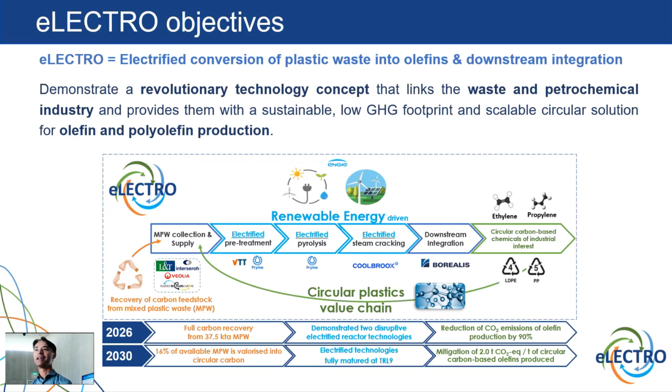And then there were some initial tests, but it was just heating. So it was a big if, because I think industry was quite doubtful: will this ever work? Because a rotating reactor and steam cracking, coke formation, this sounds like a crazy idea.

So you see here the 4 objectives. Really demonstration, large scale. Most European projects stay on bench scale. They never do something on high TRL level. Here we went to high TRL level. Both the pyrolysis and also the Coolbrook plant, which people will visit, are high capacity units. We really tried to make polymers again, starting from the plastic waste. So really closing the value chain, really showing circularity.

And then, of course, we had the electrification, and we really assessed when this concept, also from a CO2 point of view, will be better than what is currently available. And that is not always the case. I will be honest about that. It's not always the case that it's better than what's already available. It depends. And this is also something we learned. But electrification, coming with renewables, is really a good step forward.

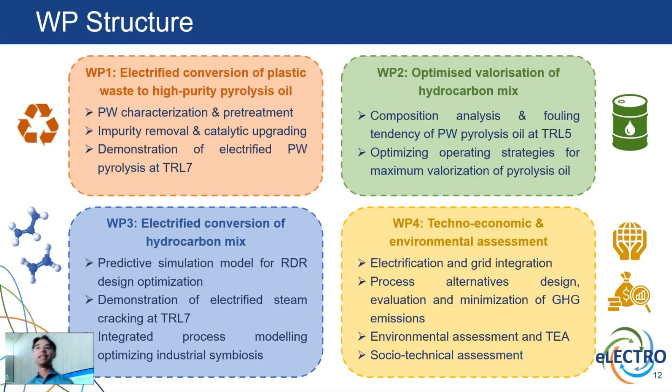So if we start with the value chain, you see, starting with plastic waste, very detailed characterization. We went to the pretreatment with an extruder. Also there you have different options. But if you really want to go for a continuous process, then feeding with an extruder makes a lot of sense. And you can at least partly remove some of the halogens, as will be illustrated.

Then we go to pyrolysis, and pyrolysis is a very robust technology, which in the end has a main product oil. And that oil can be fed to a steam cracker. You also form a gas fraction and a solid fraction. We tried to look a bit at the valorization of those products for the gas, at least as possible. But okay, it also requires some further purification there.

For the char, that is a challenge, and that also depends on which company is actually doing this. What kind of permits do you have? If you are a company like Indaver, where you have a permit to use that char to combust it again, then it's relatively clear. But if you are in the middle of nowhere, then your char can even be a cost to get rid of it. So that really affects the business case.

And of course, this needs to be optimized. So our objective is to feed it in a steam cracker. And you can do distillation, you can do upgrading, you can play with conditions. But in the end, you want to feed as much of these oils to a steam cracker.

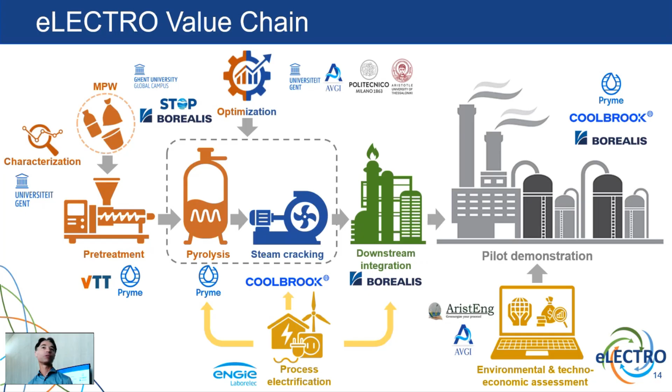And so it all started with the pretreatment. I think the main part there is halogen removal, and then here the modular extruder, and VTT will elaborate on that. Of course, the characterization is really crucial. We made a lot of effort to do that in a very detailed way.

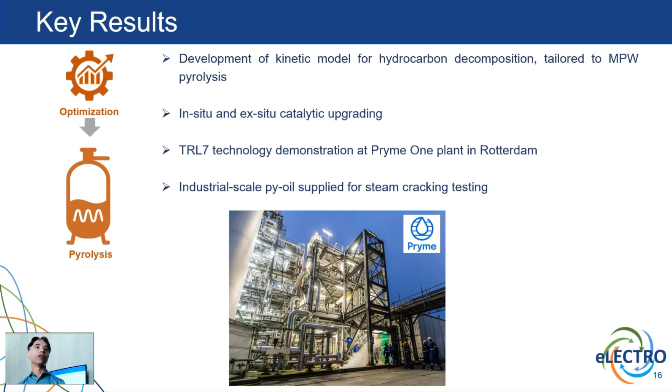For the pyrolysis, we had the pilot plant at Ghent University and Pryme, but we also had the large-scale unit in Rotterdam. So that really allowed us to show that we can actually scale this up. We also looked at catalytic upgrading, and we developed models for the pyrolysis part. So we did very fundamental work, but also very applied work.

And then we went to the steam cracking part. We compared the conventional steam cracking process with the very novel technology of Coolbrook. And well, we made it work. We didn't only use classical naphtha, but we did 100% pyoil, and that's a bit crazy, I would say. I think no steam cracking company would feed 100% pyoil to one of their furnaces. But we did it, and I think Tuomas will report a bit on the data.

The unit is still there, so it didn't explode. There's limited corrosion, I think, so it can work, and it was a very big achievement. Just the fact that we were able to demonstrate this RDR is already a major achievement. And that happened in time and within budget. Voilà, within budget. This is also never easy.

And then the downstream. If you look at these feeds, they are contaminated. It is what it is. Even if you do pre-treatment, you will end up with oils out of spec. So the question is, how do you solve that, and what can you expect? What can you do to force that a bit in the right direction? And we see that dilution helps. I will summarize it like that.

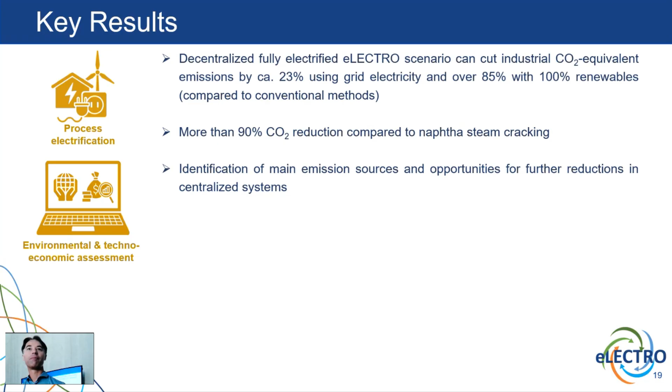Okay, today is bad, Mark, I agree. But I think if you go more to the south and see the temperatures now in France, 45 degrees, then you know what will happen in Spain over the summer, and I think we have to do something.

So we will see. Now I will hand over the word to VTT, and they will walk you through their results of work package 1 primarily. But you see that all the partners will present their contribution. We didn't really go for the classical format where we walk you through work packages. I think it's nice to see all the partners and their contributions and that they can illustrate their highlights. I think all partners did an amazing job and they deserve to be in the picture today at the end of the project. So thank you.

So hello, I'm Eetta Saarimäki and I'm from VTT Technical Research Centre of Finland. Our objective was this pre-treatment, and it was one task in work package 1. I want to explain how we did this in the project. Our target was to develop a novel extruder at pilot scale as the pre-treatment for various challenging mixed plastic waste materials for pyrolysis. And the halogen removal was targeted up to 95%.

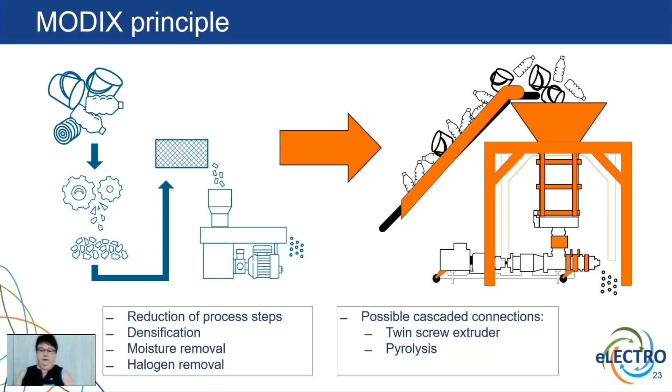And this is the simplified flow chart of this extruder. So we have now conveyor belt, and then the base Modix single screw extruder in there, and then we have this cascade system where the material goes to twin screw extruder. Now I can say that unfortunately we figured out that the output with that extruder is a bit on the low side, and we have now ordered a new one that is taking more material from the Modix extruder, and the output will be bigger. This is only something up to 10 kilos per hour, but we can double or triple it with the new extruder.

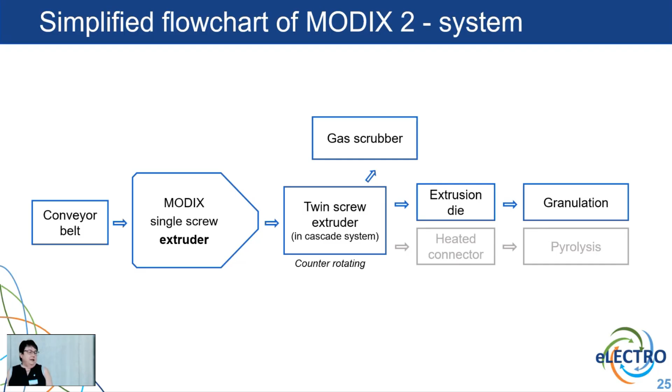After the small lab scale tests and surrogates where we knew what materials were in there, we got the materials from Korea and Indonesia. Indonesian samples are called STOP, and they came from Borealis projects, and then Korean samples came from Ghent samples. And we did preliminary analysis for the materials, and none of the materials exceeded 1% of chlorine in there, mostly even lower. And the DSC showed that Korean samples were a mixture of polypropylene and polyethylene, and Indonesian samples contained also a small amount of polyester, most probably PET, but nothing very worrying came out from these preliminary feedstock tests.

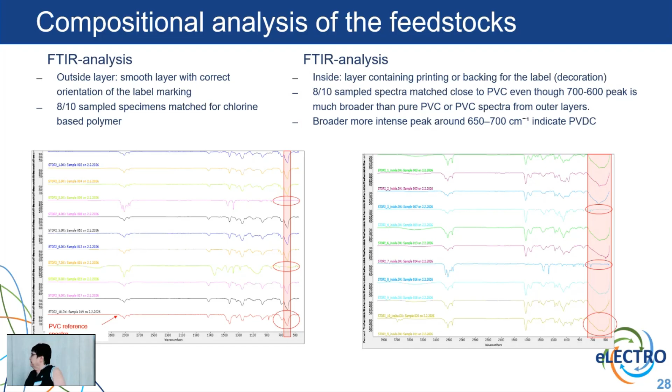But as was talked, Korean samples were quite easy to process, and we used typical polyethylene, polypropylene temperatures, and from these we were able to take the little amounts of chlorine that were in the samples away due to this efficient gas scrubber. There was one bag which came to us, which was kind of clumps, which we didn't then compact at all, but the others were real waste, smelly, dirty, muddy, and they were easily compacted and filtered, and the granulation was at a very good level.

And then when we went to the Indonesian samples, we received 3 samples, and as I told, the analysis was done only for the 1 sample, and the first test trials went very nice. We compacted it and we filtered it, and then we figured out that it's very sticky, almost rubbery-like, and then we moved the filter because we had this changeable filter. We had to change the filter opening to 900, but still that was able to be done.

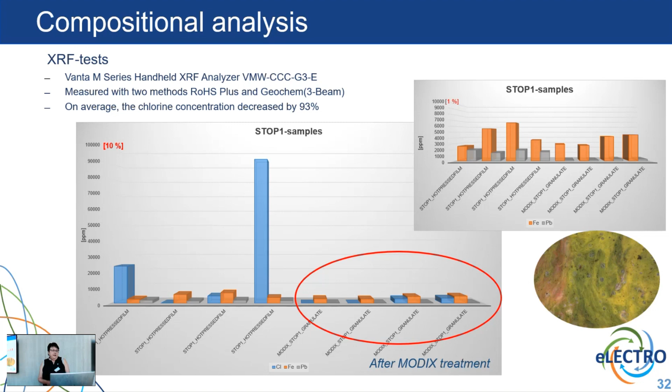And these were the preliminary tests from the samples. But after we have treated them with MODIX, this is the STOP1 sample. The reduction for the chlorine was 93%. So I think that's quite a good result based on the materials and difficulties that we faced here. And here is the STOP2 sample.

pyrolysis in any means. So the conclusion and summary about our work is that we were able to manufacture the system which pre-treats municipal waste and removes impurities from the feedstock. And we successfully built and demonstrated the MODIX 2 technology for effective impurity removal from mixed plastic waste. And we were able to make safe and more stable feedstock for pyrolysis processes for the future in this project.

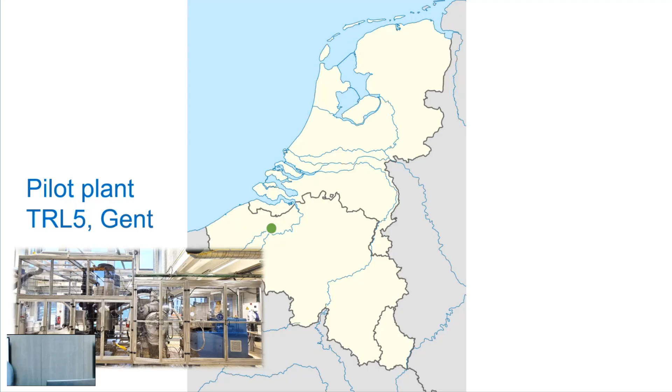So Polimi worked on the optimization tool, and with Thessaloniki, we have worked together on in situ and ex situ catalytic upgrading of the pyrolysis oil and on processing of the feedstock. Lastly, we have the demo plant in Rotterdam, where we're going to show first the place where our pilot plant was situated in Technology Park, and the demo plant, which is the TRL7, in Rotterdam. Next, we're going to show a video. I think we can play directly. Let's go to the next.

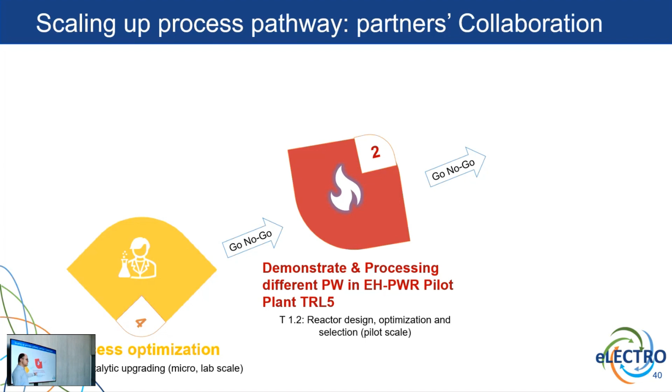And based on the results, we then say, okay, it does have a huge effect or it doesn't. So for scaling up, we went stepwise from lab scale to pilot scale, and we ended up not going for in situ catalyst for the demo plant, for instance.

Here, I'm just showing part, the tip of the iceberg of all the analytical and experimental work which we have done. For instance, here NM refers to the catalyst which we have used, and here is the GC×GC analysis of this pyrolysis oil, and you can see it's zigzagging. The reason why it's going up and down is that whenever we have a mixture of polypropylene and polyethylene, the same carbon number compound from polypropylene, which is highly branched, has a different boiling point compared with polyethylene-based pyrolysis oil.

For the next, we have done as well the purification in collaboration with VTT. Instead of going directly for processing the feedstock, we have sent several feedstocks, including surrogate feedstock, which has been prepared by LCT UGent, as well as Indonesian feedstock and Korean feedstock, and in Finland, at VTT, they have pre-processed, purified, granulated, and it went back to Ghent, where we have done the processing of these granules of the waste plastic.

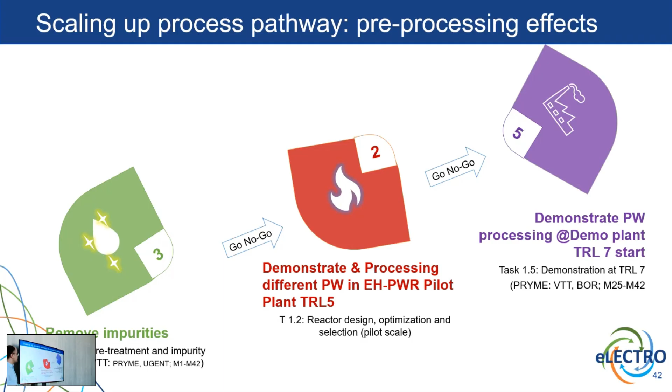So here we can see the limitation, for instance, even for treatment or purification, we cannot claim, okay, we can have feedstock with 10% of PVC. There should always be a standardized way for checking the quality of the feedstock, controlling the quality of the feedstock, and afterward, after doing this process and producing the pyrolysis oil, we can link the quality of the pyoil to the quality of the feedstock.

Because at the end, if we are producing pyoil off spec, it's not only useless, we have to pay for getting rid of the off-specification pyrolysis oil. So it's like a full chain from A to Z.

Here we go for another analysis, using the surrogate feedstock, which is in a controlled manner. Daniel from LCT has prepared this, and for impurities like biomass, PVC, and other types of impurity, it has been blended, mixed, granulated, and afterward we checked the migration of this impurity from the feedstock all the way to both the char or the solid residuals and the pyrolysis oil.

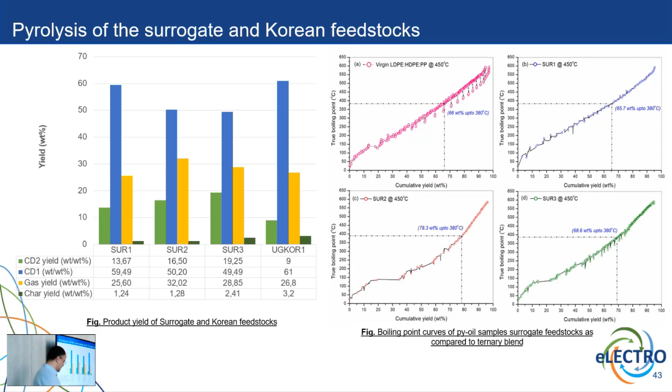Here we go for the TRL7 demo plant, and I would like to invite Dominique, CTO of Pryme. Please go ahead.

So sadly, we could not host the meeting today in Rotterdam. Otherwise, you could all have seen the pilot plant or the demonstration plant in real life. That's why we included the video. But you can really see the size of the equipment, how it is built in Rotterdam.

And first of all, some of the results which we achieved there: the results achieved by Azd at the TRL5 unit in Ghent, we compared them, of course, against similar feedstock run in the TRL7 plant, and we saw very comparable results. So I think that is very, very positive to achieve that.

We commissioned the unit early 2024, and we have conducted multiple demonstration runs. In total, over 90 runs from early 2024 till now, which total about 1,400 tons of pyoil. I will come later more on that because it's a nice number, but actually for the plant which we have built, the number is small because we want to produce kilotons per year and not 1.4 kilotons. But that was the result which we were able to achieve.

So we did demonstrate the entire process from the beginning; you have seen this truck unloading. We had a walking floor unloading system where the material was unloaded via screws. It's then fed into the two industrial size extruders, and we were able to fully demonstrate the electrified process through the electrified reactor into the pyrolysis oil, the non-condensable gas, and the char, which was free flowing. You see there a picture of that.

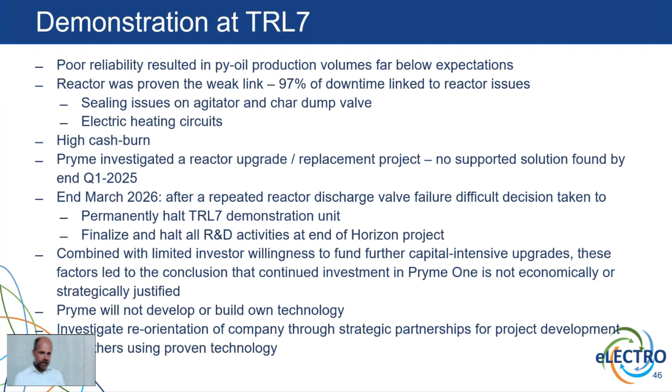And that's maybe one of the examples that sometimes you win, sometimes you fail, but we hope that there can be a continued story also from the learnings of this. So at this moment, Pryme will not continue to develop own technology and build new own Pryme plants. We will finalize our R&D activities with Horizon, and that will end by the end of this project. But our TRL7 demonstration plant will be shut down, and we will see how we can reorient our company if possible.

And linked to that, maybe a final statement is also linked to the business case, because the EU regulation plays a very big part in this. As long as there is no fixed PPWR implementation timeline with mandated percentages of recycled content, and very clear secondary legislation on how to implement it, there will remain uncertainty for getting a fixed business case. That will be affecting investors to put their money on the table. And we see that not only with ourselves, but we see Plastic Energy being here on site, being under administration, Quanta Fuel being shut down.

A lot of the chemical recycling business is struggling, not only in Europe, because also Freepoint in the US had to close down a large plant in Ohio due to EPA issues. So chemical recycling is suffering.

And of course, technology is important, but it's important that there is a strong EU regulation that supports business cases and that companies like ourselves or others have the chance to make a business case and keep investing in trying to make this work, because otherwise it will just be a lot of effort and then die off. So that was my last word, so thank you.

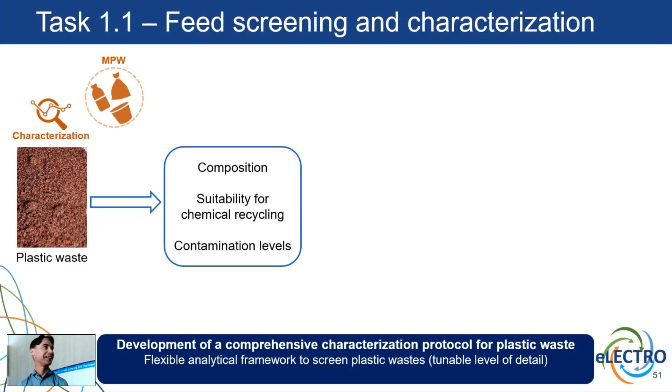And so we, as Ghent University, were very active in work package 1, work package 2, and work package 3 with the pre-treatment and the material characterization. I think Daniel sweated a lot on this topic. Getting these compositions in detail is not easy. It's a lot of work. You need to do multiple techniques, TGA, DSC, ideally also NMR, elemental composition. So you have to look at impurities, ICP-OES, combustion ion chromatography for the halogens, CHNS and O, and also, if you can, pyrolysis GC-MS, and so much more. So this is really energy intensive, at least for the people that have to do it.

And waste is always different. Every waste that you start from will be slightly different, and this really matters. What you put in does not always come out. Most of it comes out, but something can stay inside the reactor, and that's basically affected by these impurities. So we invested a lot of time on these analytical solutions and applied it to Korean waste, Belgian waste, waste from the Netherlands, and from everywhere we could get access to.

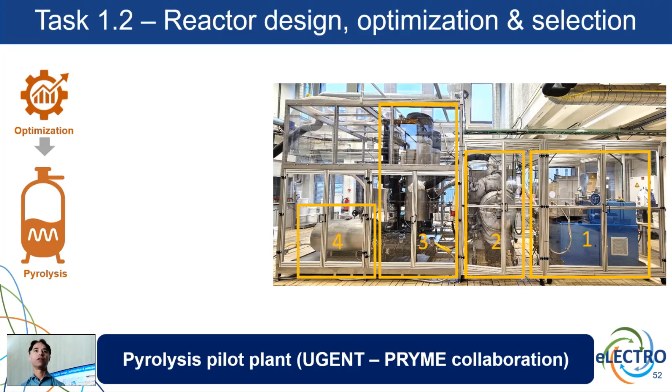And of course, we helped Pryme a lot with characterizing the oils that were produced in their pilot unit, which was on our premises. We looked at the oil with comprehensive 2D GC, with different detectors, FID, MS, AED, SCD, NCD, everything you can get access to. We characterized the gases with refinery gas analyzers and so much more. So a lot of oils were produced. I think we had almost 100 samples, and they were all characterized with GC×GC. So we have a huge database of oils and also the starting materials. It's a very unique data set, which on its own is already very valuable in my opinion.

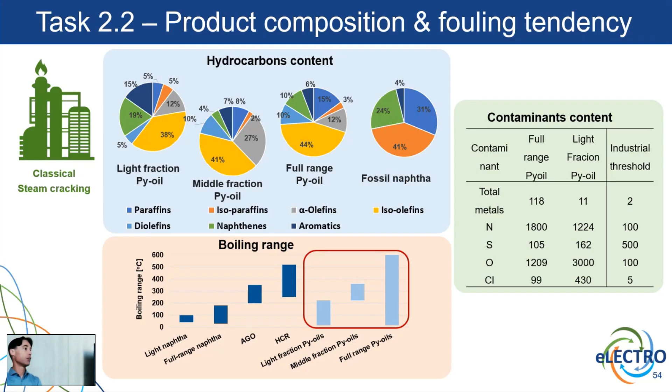We also looked a lot at the steam cracking part, and we made different blends of different oils: the light fraction, the middle, and the full range. From a yield point of view, if you look at ethylene yield with a 25% blend, it's not so different compared to fossil naphtha. Of course, it's a bit dominated by the fossil naphtha, but in the end, the yield differences are not huge. And this is not so surprising if you look at the chemistry.

But what is the challenge there? It's more the fouling. The fouling is really the challenging part. And where will the fouling happen? Well, to our surprise, it's not so much the reactor. It is the convection section and the TLE. There the fouling rates are really substantially higher.

Depending on the feed. And that's of course one of the challenges, because which waste you put in really has an enormous impact on the fouling you will get in your convection section and also in your TLE. So composition is crucial, and you need very advanced techniques to get compositional information. I think this project really helped to get a very good database of feedstocks, but also fouling rates, to get at least compositional understanding.

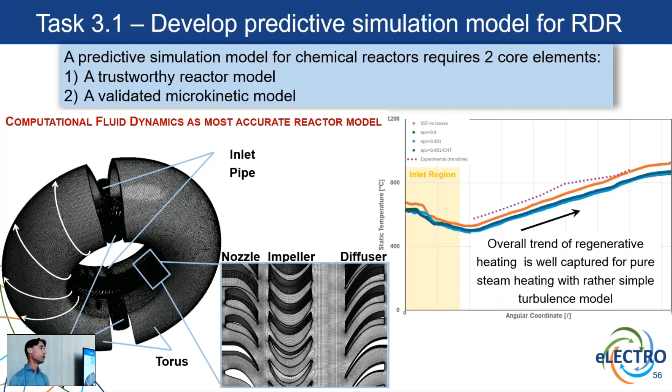And these are non-reactive data. And then, of course, it's easier to get these temperature measurements. And you see that the turbulence model also plays a role. So the model properties, what you select, is crucial to get the agreement. So we really developed dedicated models for RDR, but also for the steam cracking part.

You would say steam cracking has been done for 50, 60 years. Models are there, Spyro is there, COILSIM is there. Why would you need something new? Well, just look at all these olefins. And these olefins are not present, not in this quantity, but also in structure, in classical fossil feeds. They're simply not in there. And that makes a difference.

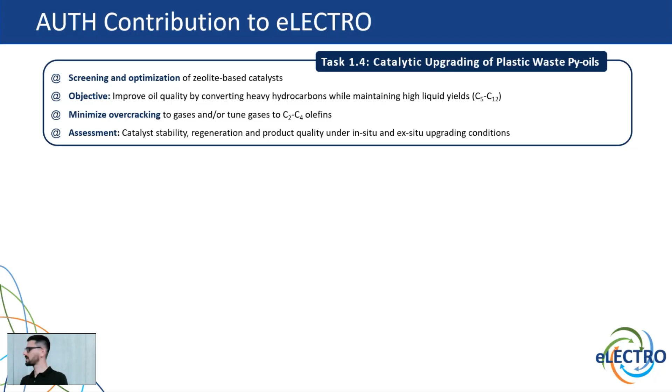To do that, we have screened and optimized various catalysts. We have used a lot of catalysts, and we have also assessed some catalytic matters like stability, regeneration, deactivation of catalytic materials, etc. From a process perspective, we have divided our work in two major pathways: the in-situ catalytic upgrading, where the plastic pyrolysis and the catalytic upgrading of plastic vapors mainly takes place in a single reactor, and the ex-situ or the downstream catalytic upgrading, where the upgrading takes place in a separate reactor under milder conditions, and we are using the crude pyrolysis oil, the thermal produced pyrolysis oil.

So as I said, we have used mainly zeolitic catalysts. We have modified them, we have optimized them, and of course we were also working on detailed characterization because we want to link the main catalytic properties to the products and see what are the properties that are mainly affecting our products. And to do that, we also needed to develop a lot the analytics. We have worked a lot. We have developed some protocols. We have developed some in-house methods. We have used also specific analysis because in total, plastic pyrolysis products, as described earlier, are very complex. So this was also a major part of our work.

And we have also used a variety of reactors, ranging from fixed bed reactors, classic batch reactors, flow reactors, in a very broad range of temperatures and pressures. And of course, we have participated in broader activities within the eLECTRO scope.

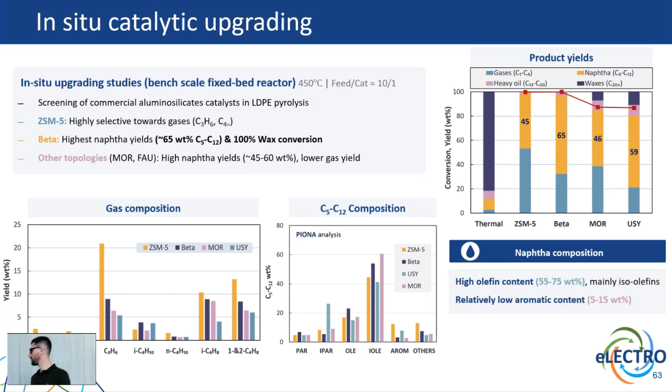So another very important parameter is the naphtha composition, the pyrolysis oil composition. More or less, we found out that during catalytic cracking, with any catalyst we used or any topology, we have a very high amount of olefins in the resultant oil, which is expected because we're talking about catalytic cracking of hydrocarbons mainly. So we had a very high olefinic content, but we have pretty low to moderate aromatic content. Also, aromatic content really depends on the condition of pyrolysis, and we can really play a little bit with it. It is really dependent on the conditions and the catalytic properties. For example, catalyst acidity plays a major role in the aromatic content for the in-situ catalytic upgrading at least.

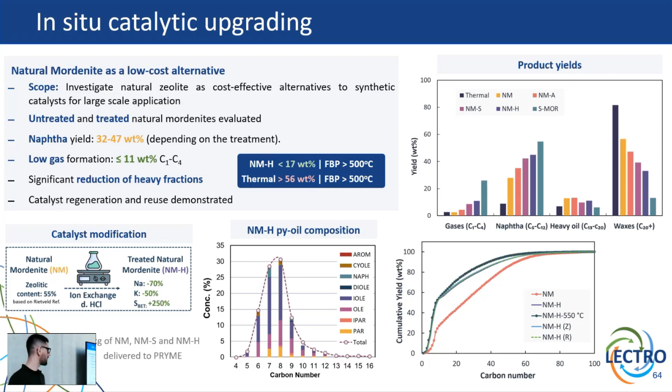For the ex-situ part, we have divided our work with model compounds and with the real oil provided from Pryme. We have mainly worked with batch reactors and fixed bed flow reactor. And for the ex-situ part, we didn't only want to see what's the catalyst effect. Of course, we have tested some zeolites here as well, just to see which one is working better for our reaction. But we also wanted to see what's the effect of operating conditions in the upgrading of oils.

So for this one, we have used different temperatures, different reaction times, different pressures. We have moved the reaction regime from gas to liquid phase. We have also used reductive atmosphere or inert atmosphere as well.

So for the model compounds, first of all, we found out that at the milder conditions we used in catalytic cracking, the ZSM5 is a very good catalyst. It's very stable, and it has the required acidity to effectively crack the oil at low temperature.

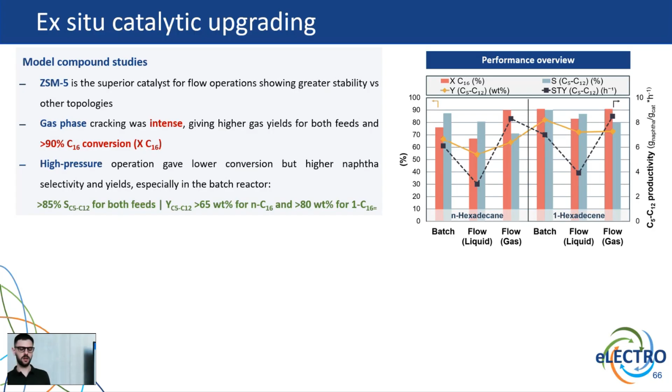Another thing we found out was that in the gas phase, the cracking was really intensive. This temperature was around 300 degrees Celsius, I think it was 290, with very high conversion of the model compounds. However, we have pretty high gas yields. On the other hand, high pressure operation gives us lower conversion, but very high naphtha selectivity and high naphtha yields as well, depending on the feedstock.

Another thing that was really important in this study was the effect of operating conditions on naphtha composition. How does it affect the naphtha? The first thing we observed, of course, is that when we used the model normal hexadecane, a normal paraffin, as feedstock, we obtained higher paraffinic content in the resultant naphtha, while when we use the alpha olefin, the hexadecene, we get more olefins. But this changes for both feeds when we increase the pressure.

So when we use high pressure and we move the reaction regime towards the liquid phase, we are actually enhancing the hydride transfer reaction. So we are basically enhancing the iso and normal paraffins in the resultant oils without adding an external source of hydrogen. Of course, this comes with a trade-off. We have also increased aromatics and some diaromatics and other precursors, but it's something that someone should consider when selecting the final technology.

Next thing, we moved on with the real oil. We selected the batch reactor because it showed the best results using the model compounds. And we followed the same philosophy. We started at 300 degrees. However, at 300, we saw that the temperature was relatively low to crack the real oil. It is something expected. Working with model compounds and the real oil is something totally different. Then we needed to increase the temperature a little bit, and at 350 we got very nice results.

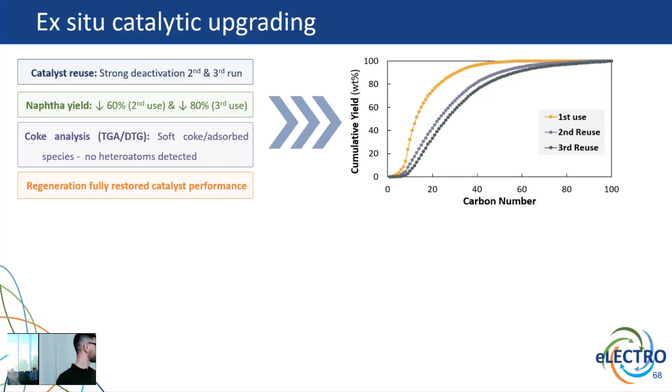So then we reused this catalyst in the second and third experiment. We wanted to see how and if the catalyst is deactivated. More or less, it is deactivated actually. The naphtha yield drops by 60 and 80% in the second and third reuse. However, after some analysis on the catalyst itself, we found out that this deactivation isn't irreversible. It's not because of the metal content of the oil, for example. It's mainly due to coke formation, mainly soft coke formation, mainly adsorbed species. So after calcining the catalyst, regenerating the catalyst, burning off the coke, we managed to totally restore its activity, and we obtained exactly identical results as the fresh material.

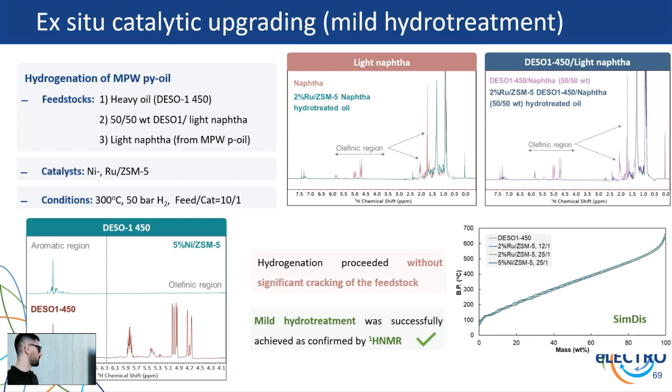Another thing we did, as I said earlier, the products are more or less olefinic, so we also worked a little bit with mild hydrotreatment. For this one, we used metal-modified zeolites, of course, under reductive atmosphere. More or less under all conditions and all the oils we tested, we managed to successfully hydrogenate the oils totally. We minimized the olefinic content, as you can see here from the NMR graphs. We totally eliminated the olefinic signals. However, we couldn't crack the oil significantly because we used very mild conditions. Actually, for hydrocracking, you need 350 or 400 degrees, but it is an option if someone wants to crack the oil as well.

We have also participated in other supporting activities. We have obtained some thermal pyrolysis data, and we delivered this data to Polimi to help them with their modeling tasks. Also, we have participated in collaboration with Pryme and UGent in pyrolysis char characterization. We have also explored some potential valorization pathways.

We have treated the char a little bit to get rid of the most concerning compounds, such as chlorine, and we have also very nice results in this matter as well.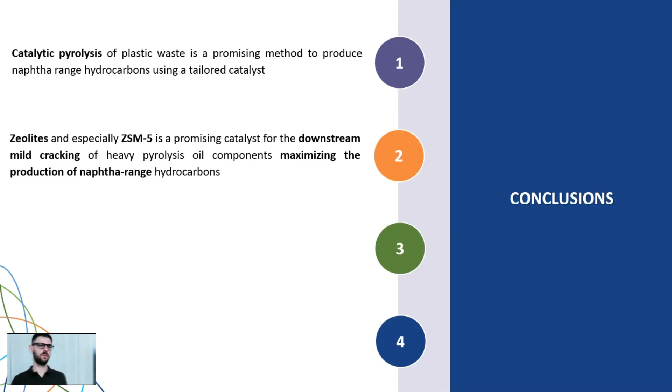So for the conclusions, of course, catalytic pyrolysis is a very promising method to produce naphtha-range hydrocarbons using tailored or specific catalysts. Zeolites, and especially a ZSM-5 zeolite, could be a promising catalyst as well for the mild ex situ or downstream upgrading of the crude, thermally produced pyrolysis oil, in order to maximize the naphtha products.

The naphtha yield and the paraffin to olefin ratio can both be tuned by adjusting just the fluid phase or reactor hydrodynamics without adding an external source of hydrogen. And of course, we think that this path, using a continuous flow or a semi-batch reactor operating under pressure in the liquid phase, shows a very high potential for real mixed plastic waste pyrolysis oils upgrading to naphtha.

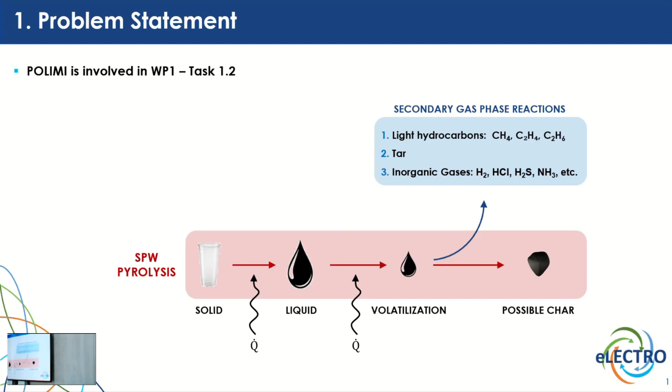So our goal was the development of a general framework to model plastic pyrolysis, and the main objective of the modeling was the possibility to optimize the reactor operation and possible design. In particular, we started to focus on the condensed phase modeling for single polymers, and we managed to model and simulate the condensed phase degradation of the main polymers which constitute the plastic waste: polyethylene, polypropylene, polystyrene, PET, and PVC.

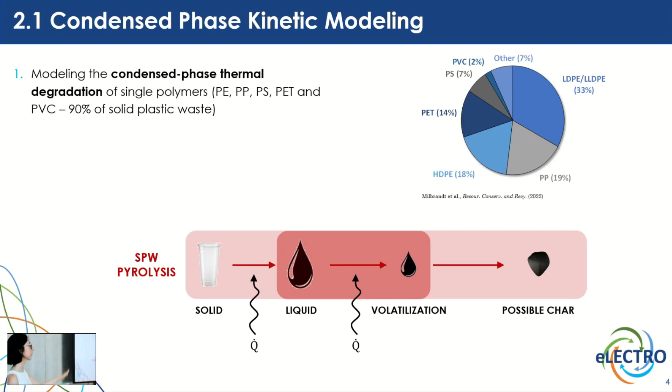We were able to validate our results in terms of polymer weight loss and also product speciation. So our goal was to create models able to reproduce the expected product distribution, and in this way also to tune the process operating conditions towards the desired product distribution. So, as I said, thanks to the models we developed, we are able to reproduce the condensed phase degradation of maybe 90% of the plastic waste.

In particular, how to model the condensed phase degradation of single polymers. We started with single polymers since, of course, there are a lot more data available to validate these models, which are based on a classical radical decomposition mechanism, with initiation, propagation, and termination reactions.

I will not enter the details of this modeling, but what I want to point out is that these models are semi-detailed, but there's the possibility to further reduce them up to multi-step models of just 5 species and 10 reactions, representative of the whole scenario, which makes it possible to couple them to very computationally expensive applications such as CFD. This is a totally general decomposition pathway that can be generalized to polyolefins and also to PVC.

Of course, in the case of PVC, there's also a strong parallel mechanism for the side group reactions, since in that case chlorine is the more reactive component. So there are also molecular specific pathways for PVC and also for PET that account for the syn elimination and the production of the carboxylic acid.

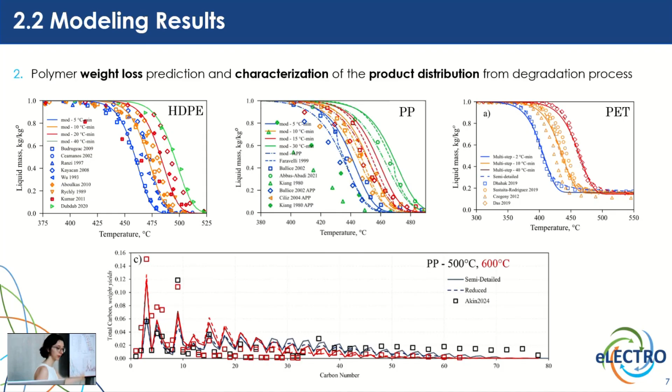We are able to capture the wide range of carbon products released from the degradation of polymers, in this case polypropylene. And clearly, the cooperation with other partners of this project, such as the Thessaloniki University, was exceptional, because we were able to use their data from micropyrolysers and validate our models and the product distribution for polypropylene, polyethylene, and PET, with very promising results.

And I also want to point out that for PET, among the different models, you can see this one developed by Andrea himself, a very reduced model that captures the experimental data very well. It comprises just 20 reactions and 10 species. So the results are actually outstanding.

And clearly, I've only talked about single polymers, but we have to account for the fact that we have to extend this to mixtures. In particular, with the help of the University of Thessaloniki, we tried to test our models accounting for mixtures. We started with mixtures of polyolefins, so polyethylene, polypropylene, and polystyrene, and we got very good results. You can see some discrepancy, but we are only talking about 20 degrees, which is actually a good result seeing the difficulty of the problem.

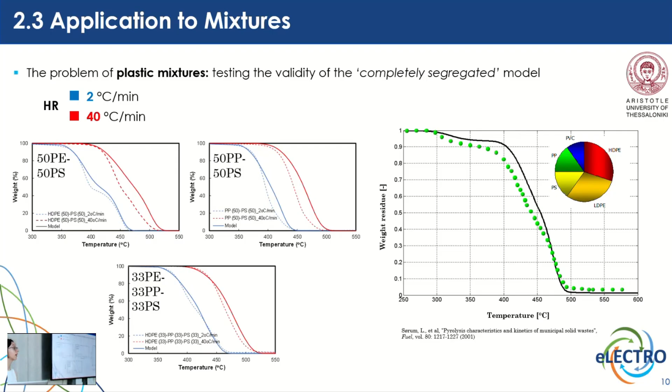And in particular, this was modeled following a completely segregated approach, so neglecting the solubility of the different polymeric phases. Clearly, this is not always the case. We can also model mixtures including PVC in a small fraction, accounting for some pretreatment of the plastic feedstock. But there's some room for improvement, because if we also account for the presence of PET in the mixtures, you can no longer neglect the solubility, for instance, of PET and PVC and the cross reactions between the different phases. So in this case, the completely segregated model loses its validity, and we are currently working on that in order to account for these additional reactions.

And clearly, as was also mentioned during the UGent presentation, the actual reactor is much more complex than a lab-scale setup and the micropyrolyzers. We have additional reactions, in particular in the gas phase. All the volatiles released from the polymer degradation can further react if the operating conditions are suitable, and since these are big setups, the residence times are usually long, which can favor and enhance the secondary reactions. So what we did was try to develop some complementary gas phase models in order to account for this additional layer of complexity.

Based on the CRECK model kinetic framework, we have a very general framework comprising kinetic models from the very base molecules, from hydrogen to methane to C4 molecules up to aromatics and soot. My work was focused on enlarging this kinetic framework by adding a detailed description of the reactivity of long chain olefins, which is fundamental to predict the product distribution from polyethylene. In particular, I developed a kinetic model able to describe the reactivity of long chain olefins up to 60 carbon atoms.

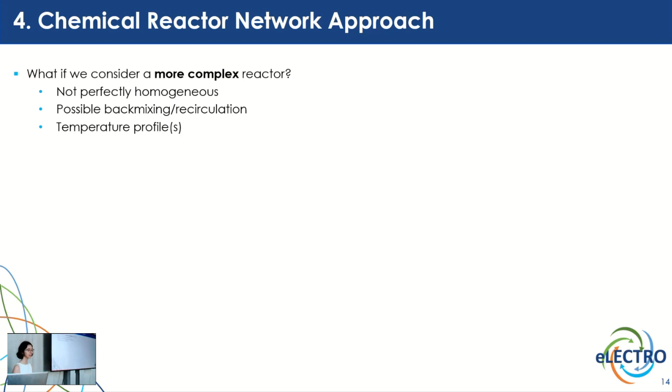And so, our further question was, what if we consider a more complex setup? What if we consider an actual reactor where the fluid dynamics is not so simple? We have recirculation, back mixing, temperature profiles. So our approach was, let's consider a bubbling fluid bed reactor and try to simplify it, because we are using semi-detailed kinetic models, and coupling this with computational fluid dynamics simulation is basically impossible. It would take too long.

So what we did was apply a chemical reactor network approach. You have a very complex setup, and you try to simplify the fluid dynamics through a network of very simple reactors, either PFRs or perfectly stirred reactors, according to the validated hydrodynamics of the setup, which for bubbling fluid bed reactors is quite well studied. In this case, what matters is the residence time distribution of the gases inside the reactor, and how to be consistent with our modeling.

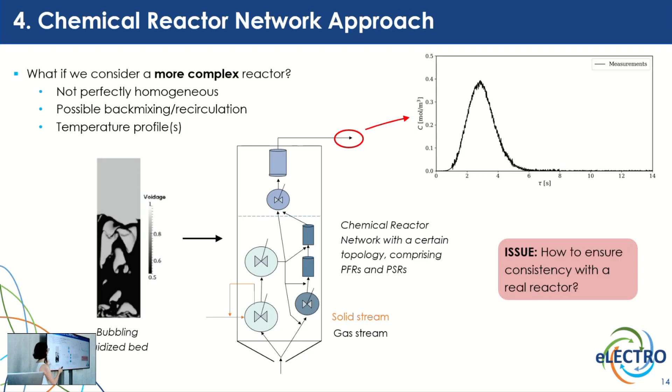Okay, so we have a residence time distribution, and we have to ensure that our model is compliant with the actual gas flow pathways inside the reactor. How to do that? I developed an optimization loop which couples the chemical reactor network resolution with a Simulink simulation in which it is possible to perform dynamic experiments, for instance, pulse experiments or stepwise experiments, in order to actually retrieve the residence time distribution inside the chemical reactor network, which is just a representation of the real reactor,

and you try to optimize the parameters, for instance, the split ratios, the flow rates, the residence times, in order to account for the actual pathways of the gas inside the reactor. And it works. It actually works. You can actually reproduce a residence time distribution, so a network where the residence time distribution of the gas is very similar to the experimental one.

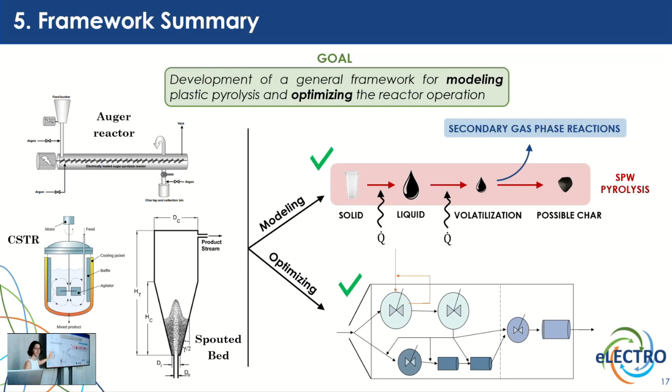Yes, we can. And so we can say that not only for a very general reactor we have a very powerful and effective description of all the kinetic modeling and their activity, but also we can actually tune our reactor model in order to account for all the non-idealities inside the actual reactor. And so we can say that our optimization tool was very well developed. And these are the publications that were done in this regard,

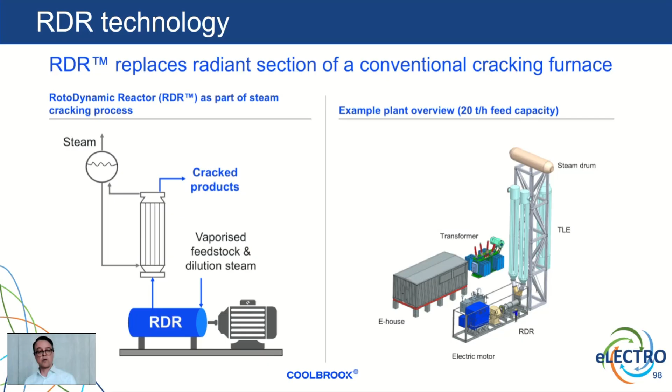We are doing it differently. We are using a turbine which is driven by an electric motor, and this turbine is generating heat with a very high power density. We are feeding vaporized naphtha and steam into the turbine and cracking the naphtha there within tens of milliseconds, and then quenching the product to stop the chemical reaction. Our part in the project was not so much to develop the technology. We were rather an experimental demonstrator of pyrolysis oil cracking in an electrified way.

And finally, after the modifications, we were able to demonstrate cracking pyrolysis oil up to 100% in our reactor. We tested many other blending ratios with naphtha as well, and we assessed the product yields, the operability of the unit, and the fouling or coking behavior of the system. Next, we will see a video on the redesign of the pilot that has been prepared by our pilot team, led by Patrick, our pilot plant manager. So here we go.

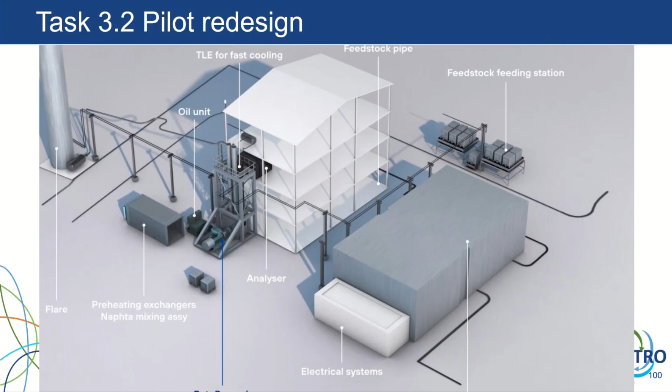Here you see an overview of the Coolbrook pilot plant. I'm going to take you around and show you step by step how the process works. This is the feedstock station of the Coolbrook pilot plant. Two containers provide naphtha into the system. We can make a changeover from one container to the other to organize continuous operation.

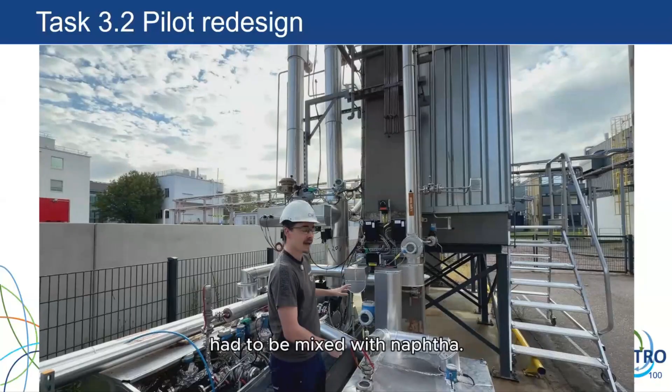The RDR system works with gaseous materials. So our liquid feedstock needs to be transferred into gaseous phase. That's what we do in this preheating station. Kai, can you explain to us what the first step is in the preheating station? Yes, the naphtha comes in through here, and here you see our evaporators. Naphtha usually evaporates between 100 and 150 degrees. But to test different feedstock, also pyrolysis oil, we had to change it to be able to evaporate up to 250 degrees.

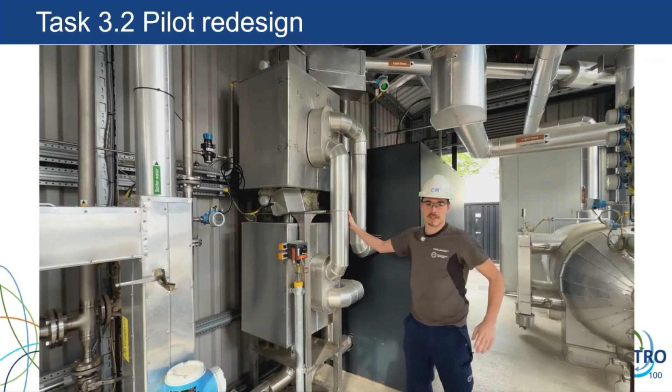So the feedstock mixture together with the superheated steam comes together in another superheater. This is to make sure there's absolutely no condensate in our system. For the eLECTRO project, the temperature of the superheater has changed from 400 to 450 degrees.

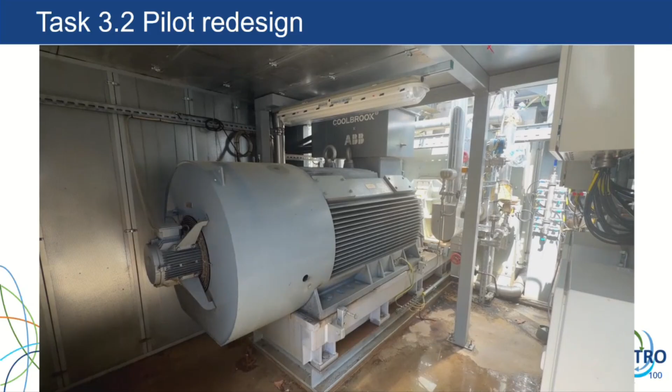The rotordynamic reactor is driven by an electrical engine. This electrical engine, with a power of 800 kilowatts, is combined with a gearbox. The engine can run 3000 RPM and the gearbox can gear it up to 24,000 RPM, needed to bring supersonic speed into the reactor. This is the reactor room where the rotordynamic reactor is positioned. During operation, it's completely closed to create a safe and inert operation.

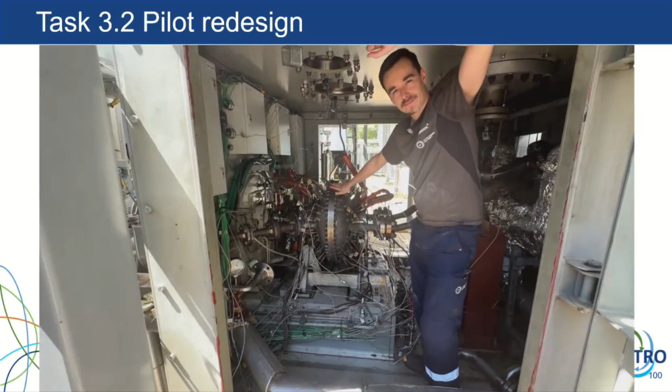Kai, our operator, is going to explain about the reactor setup. As you can see here, we have the rotodynamic reactor, our product, our piece of equipment, two inlets where our feedstock comes in, makes a bunch of rotations and comes out on the other side. You see a lot of temperature probes, so we can accurately measure the temperature inside of the reactor at any point. And we can use these connections also to take samples of the gas, to analyze the gas inside.

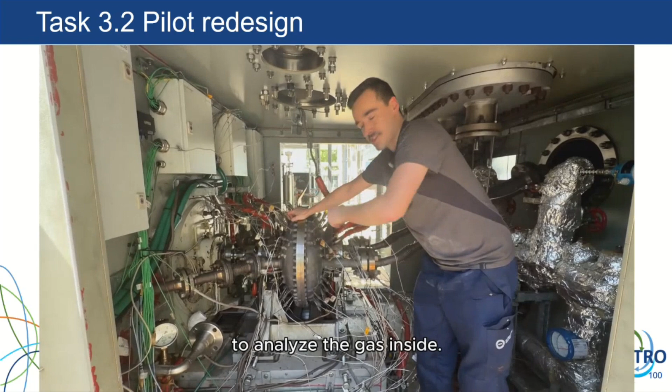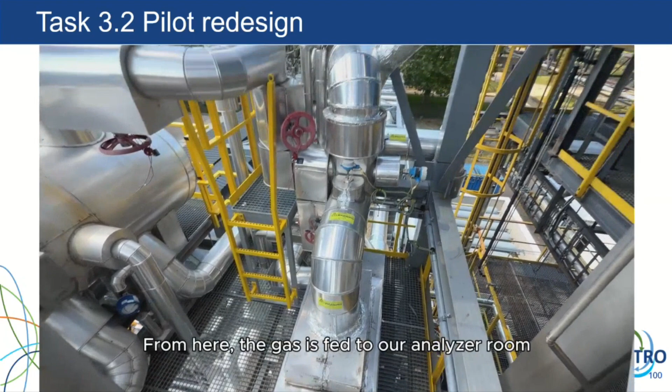This is the station where we can take our samples from the gas inside of the reactor. It gets cooled, and we have two options, taking a liquid phase sample or a gas phase sample. And we can do that at any point on four locations inside of the reactor. Cracked gas from the reactor is fed up here and is cooled on its way. From here, the gas is fed to our analyzer room, where we can analyze online the composition of the cracked gas.

Here we are at the analysis room of the pilot plant, where we have inline analysis of the cracked gas. Here we have two gas chromatographs, one to analyze a broad spectrum at hot temperature, 300 degrees, and a micro GC for the smaller components, cooled to 70 degrees. For the eLECTRO project, we placed an SCD to detect sulfur, because pyrolysis oil contains sulfur.

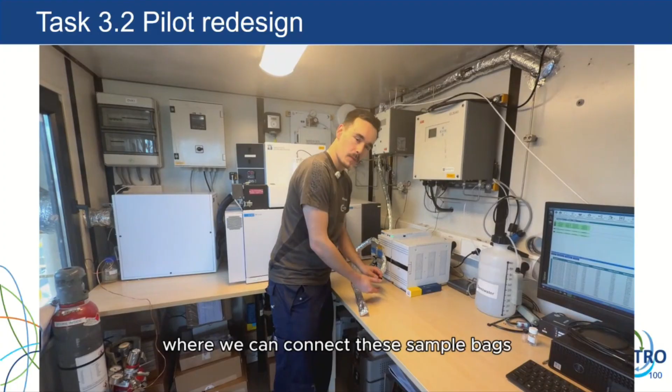Kai, you just told us about samples being taken in gas bags. Can you also analyze them here? Yes, here we created a setup where we can connect these sample bags, where we can analyze it from the bag instead of inline from the system. We've shown you around our pilot plant and highlighted the modifications we made for the eLECTRO project.

Increase of the temperature in the evaporator, increase of the superheater, and installation of an SCD next to a tracing to heat up the pyrolysis oil. But that was not all.

We also had to work on our permit. To run pyrolysis oil, we need to have a modification of the permit. Pyrolysis oil has a specific status within the waste regulations in the Netherlands. So in order to run the pyrolysis oil in the project, we modified our permit with the help of the Brightlands Chemelot campus, which allowed us to run the pyrolysis oil and complete the project. It was a great pleasure to join the electro project, and we're very proud of the results of the whole consortium.

Thank you, Patrick. That gave you a good overview on the pilot plant and the modifications we needed to do in order to be able to run pyrolysis oil. And some of you will, of course, have the opportunity to see the pilot plant later today.

And then the final part of the project for us was a demonstration of the electrified steam cracking of pyrolysis oils in the RDR. The testing itself went really nicely, successful and controlled runs. We had full testing of yields and coking rates with 10% and 25% bio naphtha blends. And then we did some additional testing with 50% and even up to 100% bio feedstock.

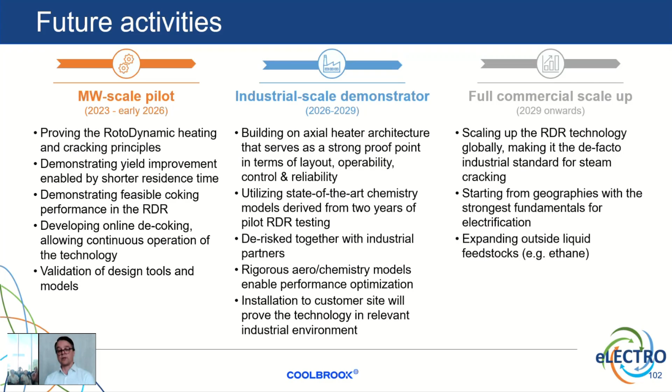So we can now move on to the Engie presentation. It will be a two-voice presentation with first Jeroen for the grid integration and the energy aspects. So hello everyone, my name is Jeroen, I work for Engie. Maybe first a quick word about Engie.

What is Engie? Well, Engie is an energy provider, so it sells electricity, it sells gas. We have a lot of wind turbines, PV panels, basically everything that produces electricity we have in our fleet. But we also have a lot of plants running on gas. So we have those two expertise. And today I am speaking for Engie Laborelec. What is Engie Laborelec? It's the electrical expertise center of Engie. Later on, my colleague Enrico will speak, and he's more the gas expert, from Engie Crigen.

So what did Laborelec do? As electrical experts, we looked at the grid integration of the RDR. That was one first step. Then once that was done, we selected two potential locations in Europe to install a full-scale plant based on RDR. And then we looked at how do we supply these plants with electricity, and we computed, of course, the cost and the CO2 emission. And Crigen looked at the off-gas valorization, because with RDR, we are using electricity and not the CH4 and H2 that was coming out of the process anymore. We can valorize those off-gases.

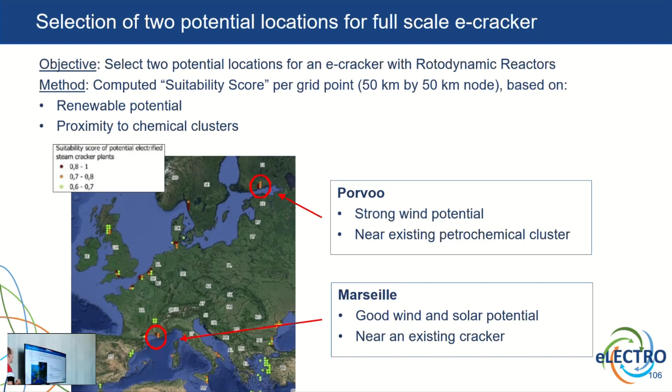Once we had that, we went to the biggest part of our work, which was, and I will read the sentence with you, to compute the cost optimized. So what do we mean by cost optimized? We look at CAPEX and OPEX spread over the lifetime of the RDR plant. So we compute the cost optimized energy. What do we mean by energy here? It is the electricity you use to feed your RDRs and the whole plant. And we look at the supply mix.

What does it mean? It means that we start from a blank page and we say, okay, if we want to feed a full-scale RDR plant, we need to install, I would say, 10 wind turbines, 50 solar panels, and 10 batteries. That's basically what we are doing. And we are doing this for an electrified steam cracker with a rotodynamic reactor, for the 2 locations we just selected: one in the south of France, and one in Finland.

It's important to emphasize also that we started with a blank page. So it's not that we said we can reuse the nuclear power plants already installed, for example, in France, because they are already being used for other purposes. So everything that we are installing is new capacity. Okay. And I skipped the methodology because it's not very complex, but too long to explain. We will jump immediately to the conclusions.

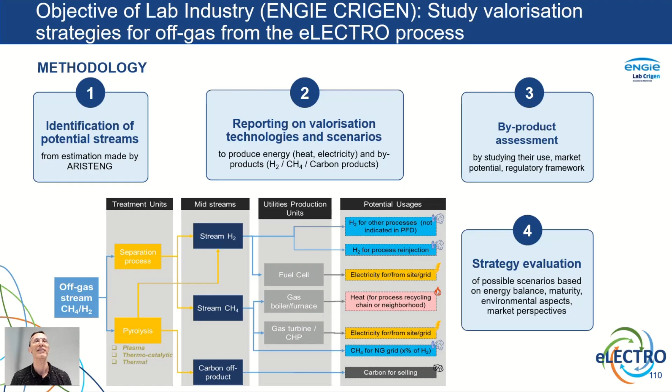First, the optimal solution is context dependent, driven by local electricity costs, carbon intensity, and market conditions of byproducts. Second, the separation is the most robust and low-risk option, with low electricity needs and capex, but limited in CO2 reduction.

Finally, pyrolysis options offer the highest value and emission reduction, but require favorable conditions, namely competitive electricity, sufficient technology maturity, and viable byproduct markets. So to conclude this short presentation, our study identifies the most promising strategies to valorize off gases in the electro process, assessing them from technical, economic, and environmental points of view, and clarifies the conditions under which they become viable, depending on local and global context.

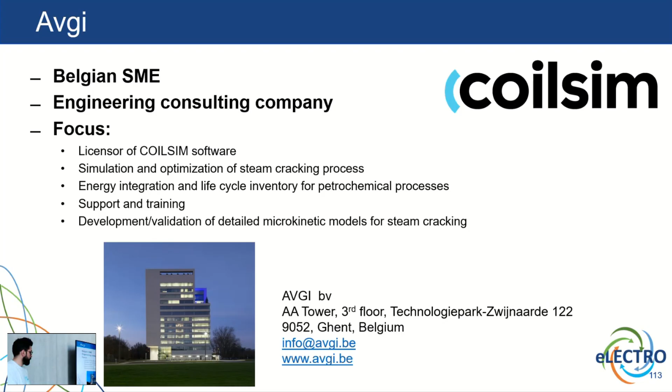So, short introduction of AVGI. AVGI is a Belgian SME. Our focus is advanced modeling, or advanced simulation and modeling of steam cracking process, also petrochemical processes. So we develop and validate detailed microkinetic models for steam cracking. This is our team, consisting of six people actively working on this project, and I'm very happy to present their work today.

So the role of AVGI within the consortium was threefold. We did the Work Package 4 coordination, ensuring that there was close collaboration between the partners of Work Package 4, ensuring that the information between the produced models of the projects were used in the different tasks. Next to that, we did also some technical and simulation work across other work packages, especially Work Package 2 and Work Package 3. And then finally, we conducted the techno-economic and scalability analysis for Work Package 4.

So just a few words about Work Package 4. Work Package 4 is mainly led by 4 consortium partners, Engie, AristEng, Ghent University, and AVGI. Currently there are 3 tasks ongoing, which will be finalized in the coming 3 months. Second part of this presentation will be about the technical work that we conducted, especially for Work Package 2 and 3. This will be very short due to the limited time that I have to present the work.

So first task that we did together with Pryme and Borealis was to look at fractionation. We developed a rigorous distillation model in PetroSim to ensure that we can estimate the utilities needed to do the pre-fractionation, and then a complementary model on a split factor on species level, making sure that we have an accurate input for the COILSIM model so that you can perform severity optimization using COILSIM.

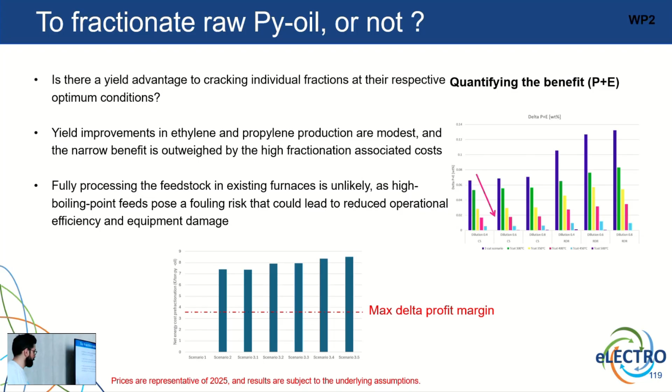So yes, we see some yield improvements, although they're very modest, and their benefit is outweighed by the high cost associated to fractionation. Although the answer is nuanced, pre-fractionation might be needed, due to the high final boiling point of pyro, to ensure safe operation in existing assets.

Second question that we tried to answer was how much pyro can an existing asset take without running into certain bottlenecks related to incomplete evaporation, coking behavior, excessive condensation, coking in the TLE, and what's the effect on run length. So together with Borealis, we developed a comprehensive full furnace model of their existing assets, and we performed simulations using COILSIM for various blend ratios, pyro distillation cut points, and cracking severities.

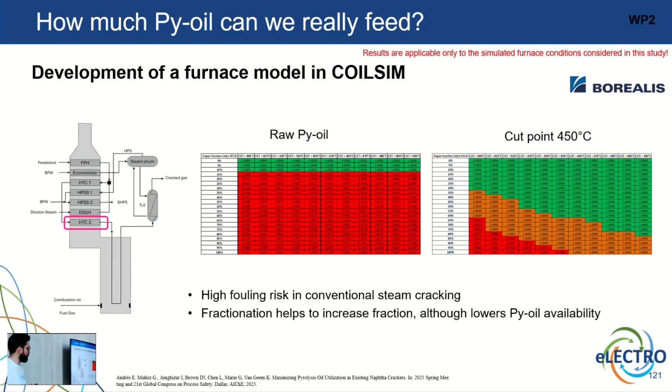So these are the results of these simulations. We looked at different things. I will only focus on the evaporation part in the convection section. For raw pyro, we saw starting from 10 weight% that we run into evaporation issues, so that the feed is not fully evaporated in the lower banks, leading to higher risk of fouling. You can increase the amount of pyro if you perform fractionation. If you have a cut point of 450 degrees, you can go higher, up to 30% pyro.

Second task that we were working on together with Ghent University was the development of a microkinetic model for pyro within CRACKSIM. Using the single event microkinetic methodology, we were able to expand our model to accurately describe the thermal decomposition of species within pyro. For that, we used the information from the other work packages, especially work package 1 and 2, where their detailed analysis about the feed's composition and the molecular species within pyro was used to feed the network generation.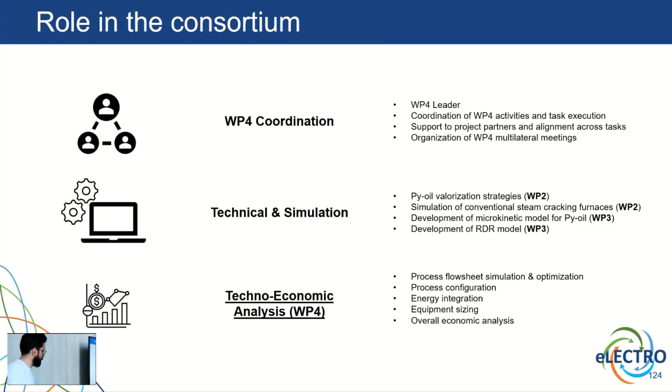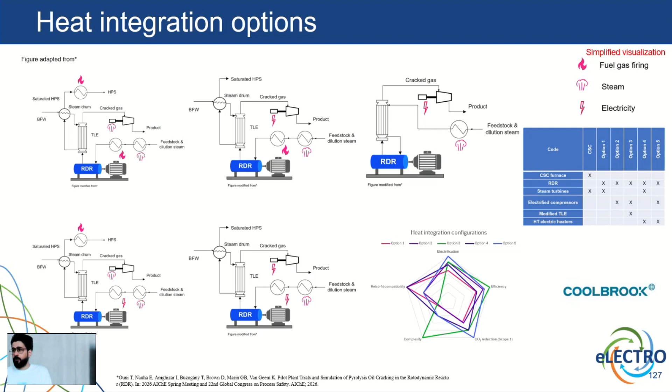So in short, they're just different in how compressors are driven. So we have different configurations where the compressors are driven using high pressure steam or electricity, and then another key difference is the high temperature preheating of the steam hydrocarbon mixture. So all these configurations were simulated, and the energy and mass balances were calculated.

One of the key results that we saw is that to feed a world scale ethylene plant, we need roughly half of the available waste in Europe. So pure pyrolysis oil cracking is very unlikely. So therefore, it's also important to consider cases where pyrolysis oil and naphtha are co-cracked.

Then we also did some techno-economic analysis. Steam cracking is a very high energy intensive process, so the energy price is very important. So we looked at the electricity price versus the fuel gas price, and we calculated the break-even points. So at which point do the RDR and the conventional steam cracker lead to the same economic performance? And depending on which scenario we're looking at for the electricity price, the RDR has potential to outperform the conventional steam cracker. But this is a relatively low electricity price, so only in optimistic scenarios can this overall concept compete.

Next to this, we also looked at the difference between naphtha cracking and pyrolysis oil cracking. So we saw that to have a break-even, we need a premium for recycled content, which is about 2.5, or 3 if you're very strict about your definition. If you only include ethylene and propylene, you need a factor 3 premium price for these products.

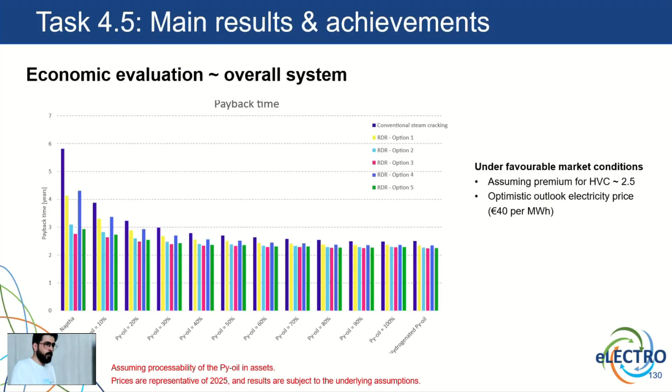You showed those scenarios about the electricity becoming optimistic to realistic to conservative. Did you include CO2 price in your calculations? Yes, but we saw that the CO2 pricing is actually not the main contributor. So we'll have to go to very high CO2 prices to actually make a dent in your economy.

CO2 was used for fuel, but electricity was not assumed 100% green? Yes. We didn't really assume. Well, this is part of the life cycle assessment, and that was part for our partner AristEng. So we didn't really look at the origin of electricity.

So, well, if we look at CO2, it's mainly scope 1, so whatever is exhausted within the plant. We didn't look at the other scopes for your CO2. So this electricity could be just grid electricity. It's just the market price that we're looking into here. All right, thank you.

We are now going to the AristEng presentation with Amvrosios regarding the LCA process optimization. Well, AristEng was responsible for 3 tasks, tasks 4.2, 4.3, and 4.4. Tasks 4.2 and 4.3 have been completed, and the only remaining unfinished task is task 4.4, the environmental assessment of the electro process. Of course, the deliverable is scheduled for submission within the agreed time frame by month 48.

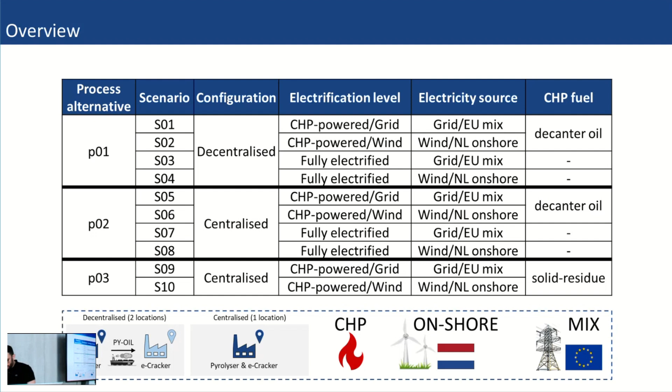So we assessed 16 impact categories using the commercial software SimaPro across all scenarios from scenario 1 to scenario 10. For now, results have been collected, but are currently being processed. Once this procedure is completed, we will upload the updated database on eLECTRO as well.

However, during this presentation, we will focus only on the climate change impact for comparing the environmental performance, and we will also present an uncertainty analysis using Monte Carlo simulations to assess the reliability and robustness of our results. Let's start with the deterministic results. Deterministic means fixed inputs, and the model produces just a single result.

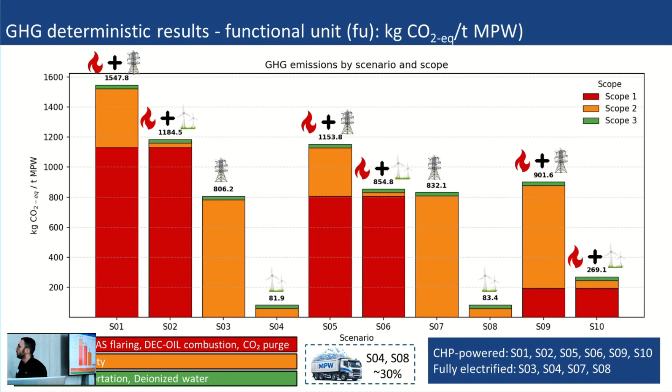So let's move to the uncertainty analysis. As I said, we use Monte Carlo simulations, but we will focus, due to time limitations, only on scenario 3 and 4. So, to assess the robustness and the reliability of the results, a Monte Carlo analysis was performed using 2,000 iterations, using in-house codes.

Uncertainties were applied to the grid electricity emission factor, to the electricity demand, and to the distances of mixed plastic waste transport and oil transport. Note that all the simulations were performed simultaneously. Also, uniform distributions were used when values within a known range are considered equally likely, and log normal distributions were used to ensure positive quantities.

Let's start with scenario 3, the decentralized fully electrified scenario powered by grid electricity. Note here that the Monte Carlo analysis considered uncertainty associated with the emission factor of grid electricity across potential EU deployment locations. So actually we performed a geographical variation here. And results show that 90% of the predicted GHG values lie between 211 and 2,222 kilograms CO2 per ton of mixed plastic waste.